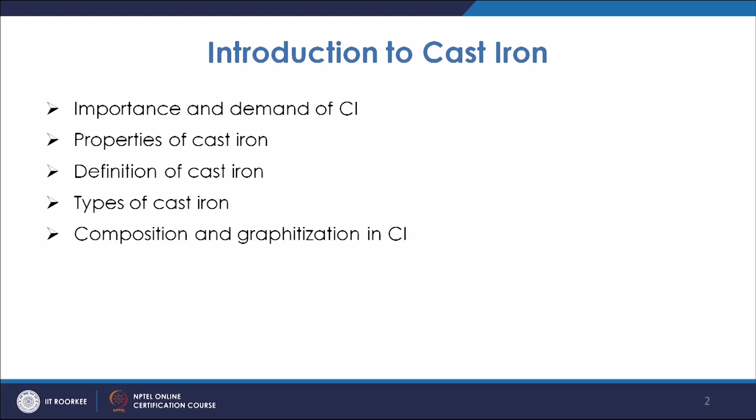Because of these properties and because of the ease with which it can be cast, this material is given so much importance. Most components, if you talk about the iron carbon system and alloys of iron carbon base, because of certain advantages in terms of casting, you always prefer to use cast iron.

So what is cast iron basically? Cast iron is the alloy of iron and carbon where carbon percentage is more than 2%, and apart from carbon you have other alloying elements like silicon, manganese, and small amounts of sulfur and phosphorus. So that is cast iron.

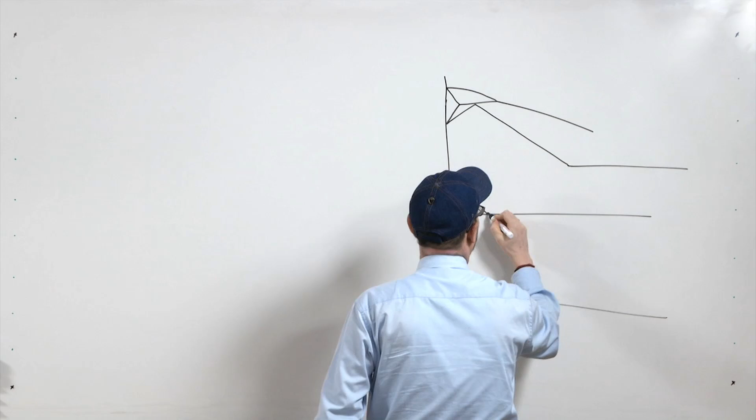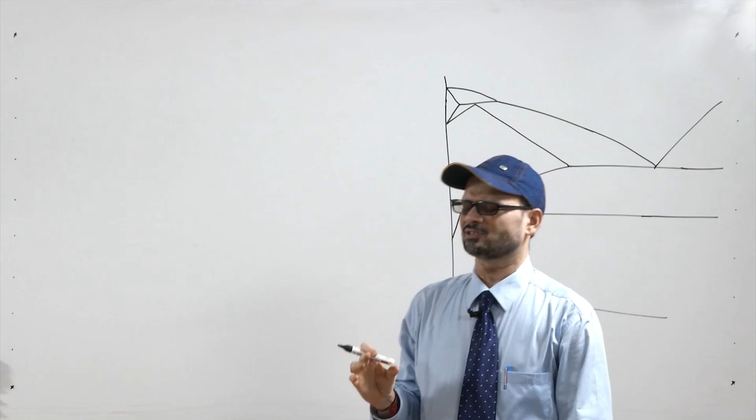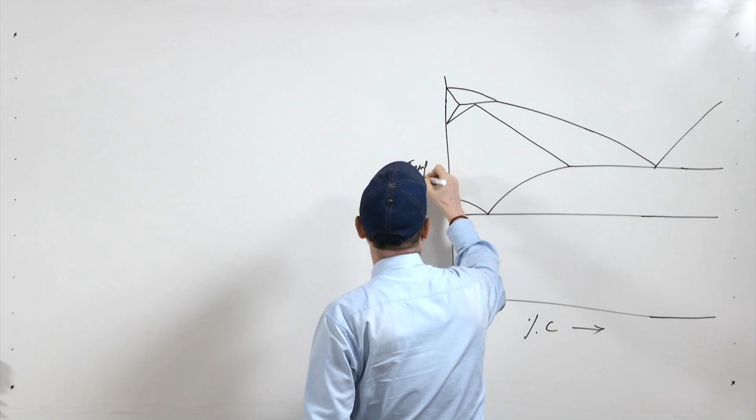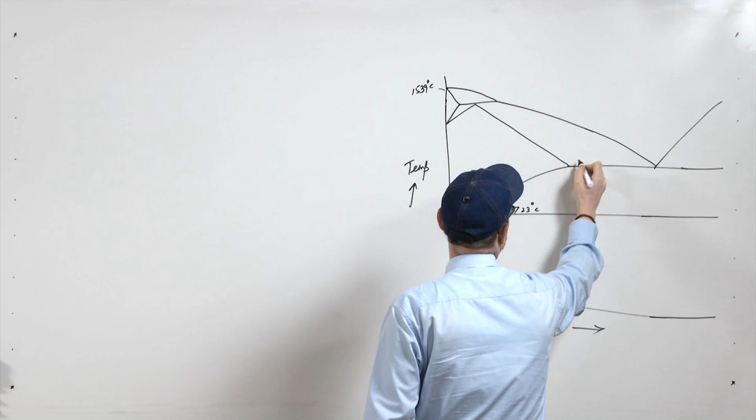Now let's see the difference between cast iron and steel. When we talk about steel, if we see the iron carbon diagram at this point, it goes like this. This is a normal iron carbon diagram - you have equilibrium as well as metastable equilibrium diagram. On this axis you have percentage carbon and this is the axis of temperature. We see this is close to 1535 or 1539 degrees C, and then this is the 723 degree centigrade line, this is the 1135 degree centigrade line.

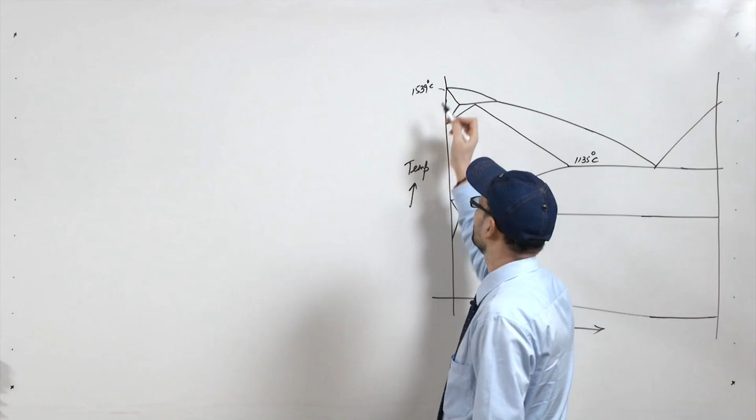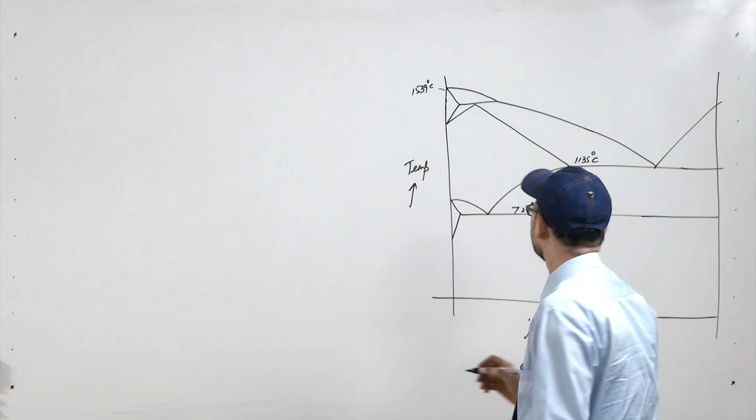As the carbon percentage is increased from pure iron - this is 100% iron, and in this direction the percentage of carbon increases - we see that pure iron melts at about 1539 degree centigrade, but as the carbon percentage increases, this liquidus line decreases. This point is known as the eutectic point, where the carbon percentage is 4.3%, this is 2%, and this is the eutectoid point, at 0.8%.

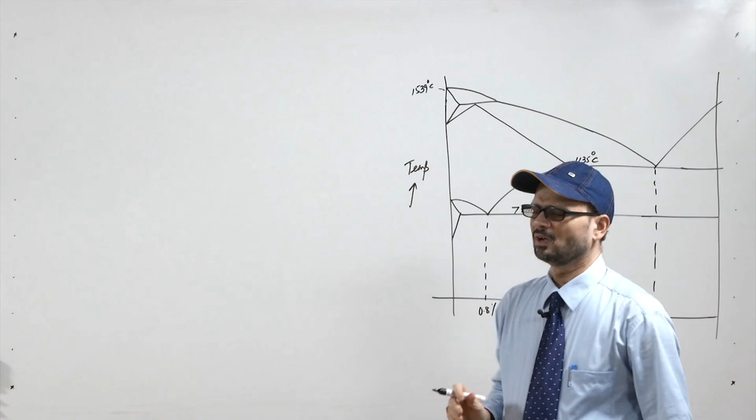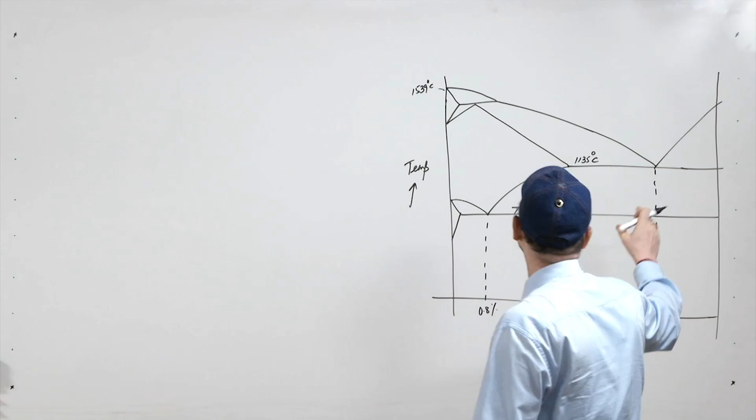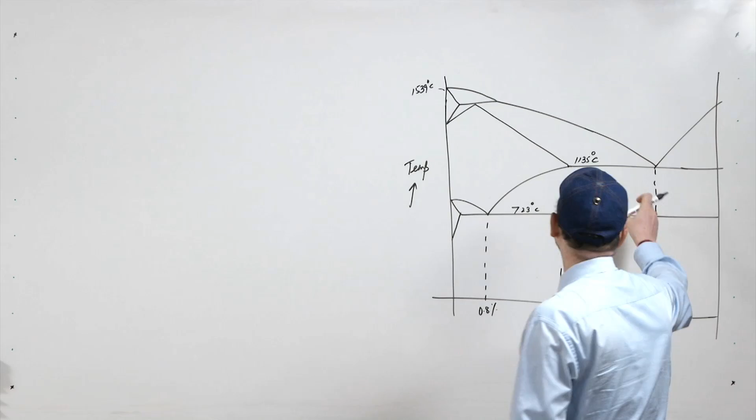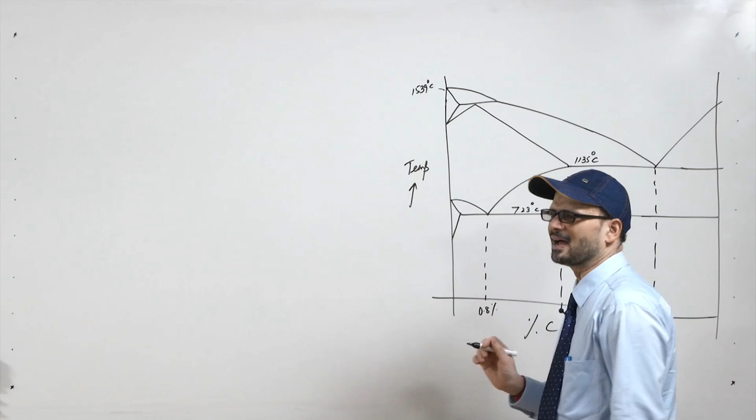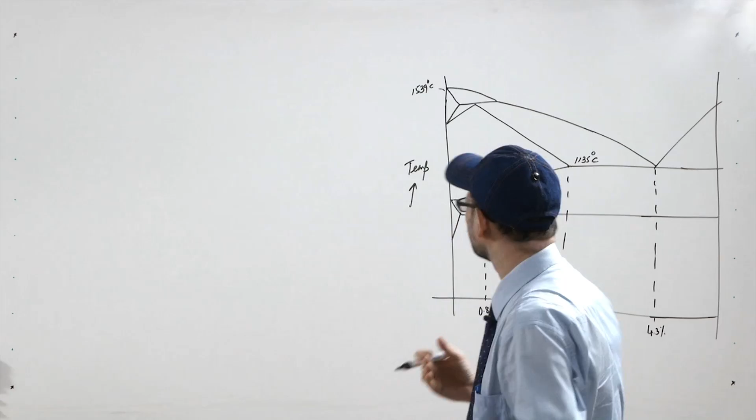Even a cupola is enough to produce grey cast iron or cast iron varieties of materials. However, if we talk about steel, steel is normally an iron carbon alloy with some alloying elements, but below 2% or 1.5% carbon - and that range requires quite high temperature. So you require a furnace that can generate high temperature, and in that case the furnace requirement and the lining requirement have to be different.

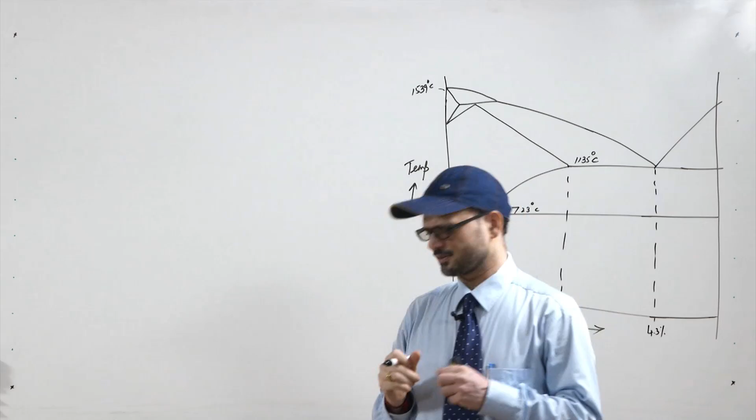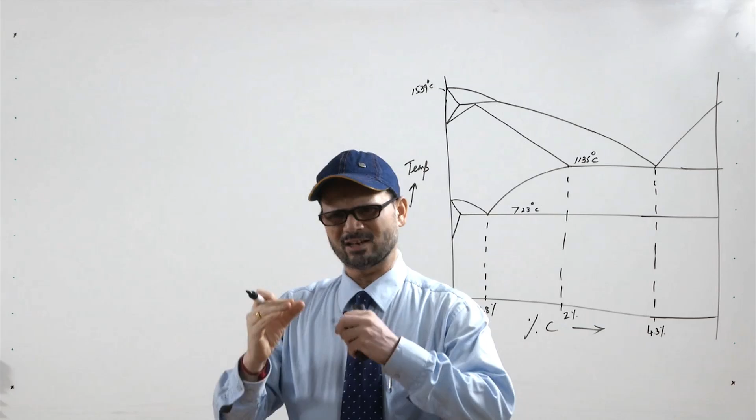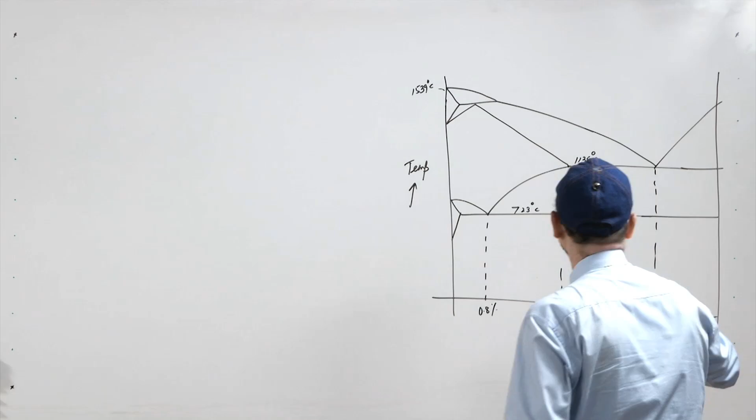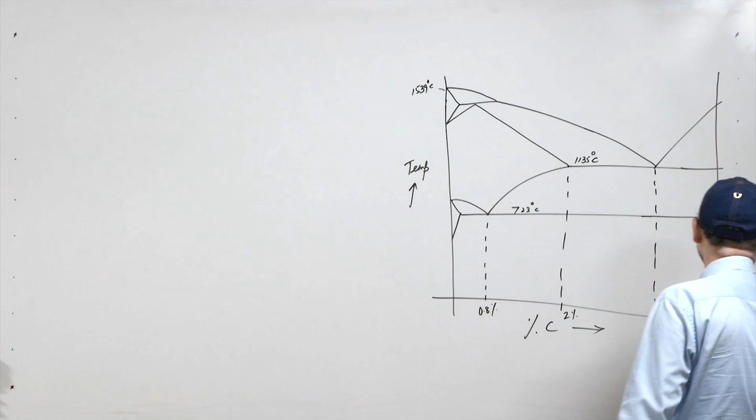Apart from that, in the case of cast iron, apart from iron and carbon, one of the chief alloying elements which plays an important role is silicon. Silicon is a graphitizer. The carbon that is in steel up to this point is normally present in combined form with iron as Fe3C - 6.67% is Fe3C, which is the intermetallic compound cementite.

Now in the case of cast iron, the composition as well as the cooling is adjusted in such a manner that when it cools, this excess carbon is basically changed to graphite - that is free carbon. So in that case this carbon is not in the form of Fe3C. It depends upon the cooling rate and composition.

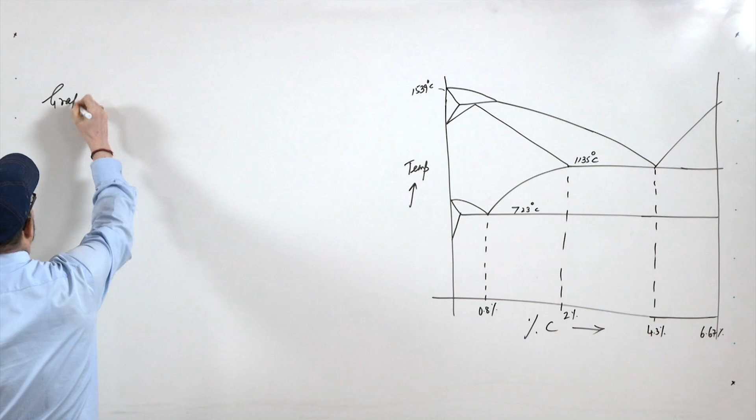The carbon may transform to the combined state, that is Fe3C form, or carbon may go as graphite. Now this process is known as graphitization, meaning the carbon which is there in excess has to change to the graphite form.

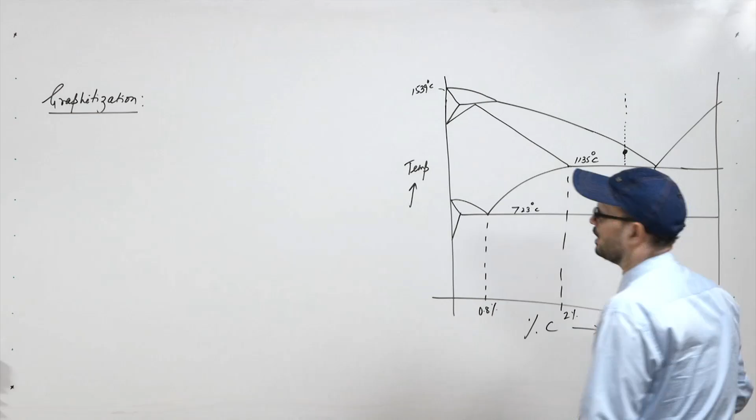Now let us see what happens if you have this point which is coming, we are melting at this point. When temperature has become less than this liquidus line, once you come below this liquidus line, you have liquid plus austenite. So this is your austenite, this is austenite plus liquid.

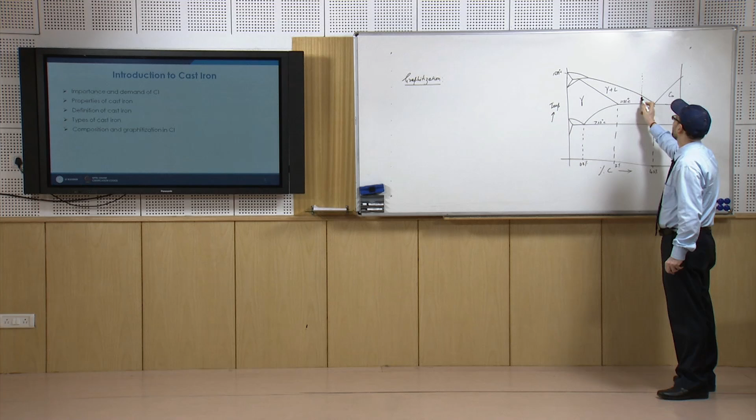So this is your cementite, and then this is basically the eutectic line, that is ledeburite. Now once you have come to a temperature below this, you have at this point austenite plus liquid. So you have solid crystals of austenite coming out, and this austenite has a composition corresponding to this point. So as the temperature comes down,

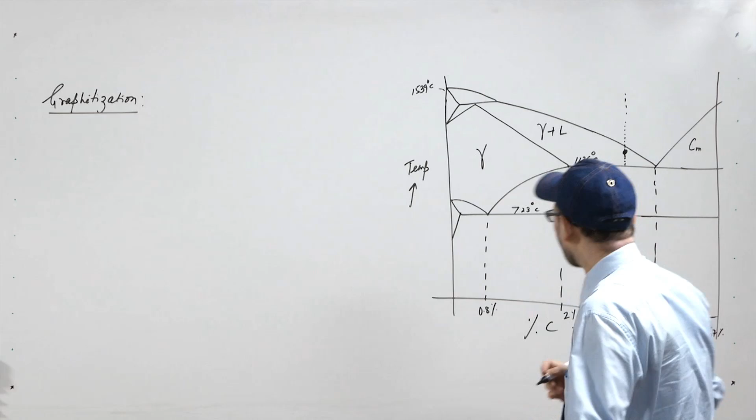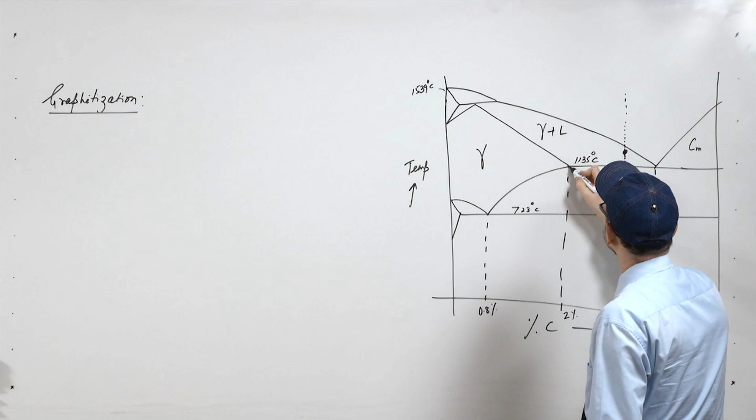this austenite will basically be losing the carbon. At this point, up to 2% of carbon, the austenite has a maximum of 2% carbon. After this, once it comes just below this line, the freezing is completely complete, and at this point you have austenite with maximum composition of 2%, but once it comes down, again the carbon solubility in austenite decreases as per this line.

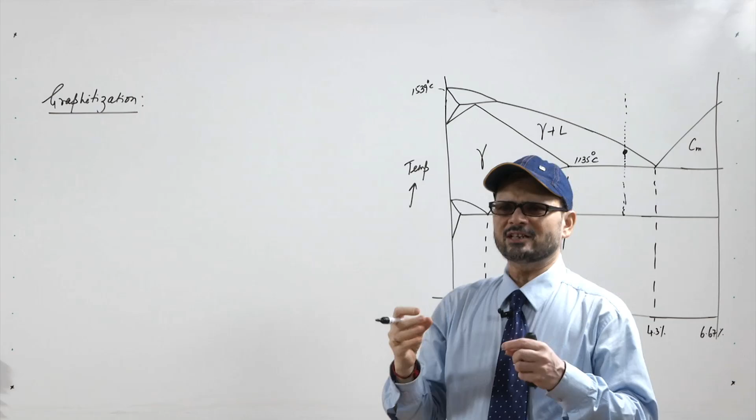So once it comes to this line and touches it, the austenite which was there will be losing carbon, and maximum it can have is 0.8% carbon. So it will be somewhere close to 0.6 to 0.8% carbon it can maximum dissolve. So all the extra carbon will be disposed of, it will be left by this austenite. Now this carbon, once it goes, may appear either as combined form or as graphite form.

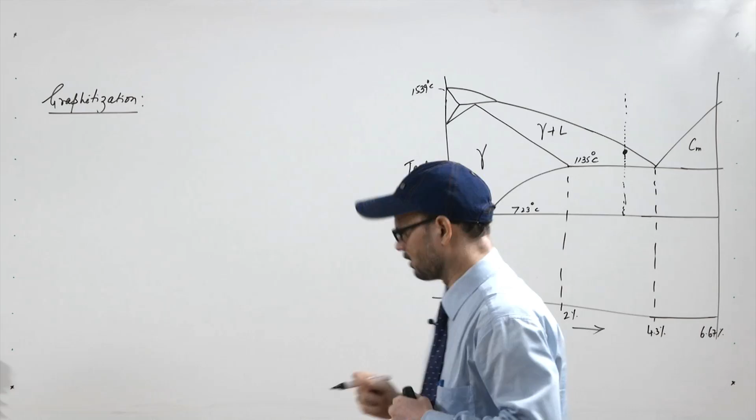Now the chief role of the alloying element silicon is that silicon is a graphitizer. So because of the presence of silicon and also because of the low cooling rate, this carbon is basically present as graphite. So graphite is soft, and that is why in cast iron, as you cast in normal circumstances, if you have enough silicon and the cooling rate is moderate, you get the carbon in graphite form.

So that is how this happens, and once it further comes down, then depending upon the extent of graphitization, once we come after this line, you have this composition, this is your eutectoid. So you have this pearlitic structure, you have ferrite plus pearlite. So the matrix may be ferrite or pearlite or a combination of ferrite and pearlite.

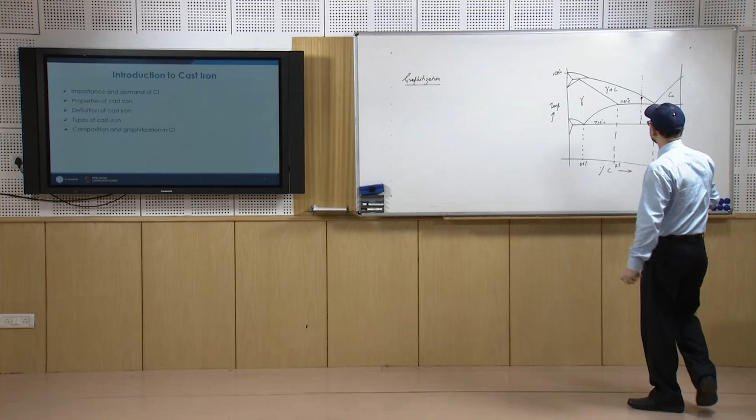Now again, what type of matrix you will get depends upon the extent of graphitization. So if the graphitization is maximum, then you are likely to get the ferritic type of matrix, because most of the carbon which is released is present in the form of graphite because of the graphitization process and because of the presence of alloying elements like silicon.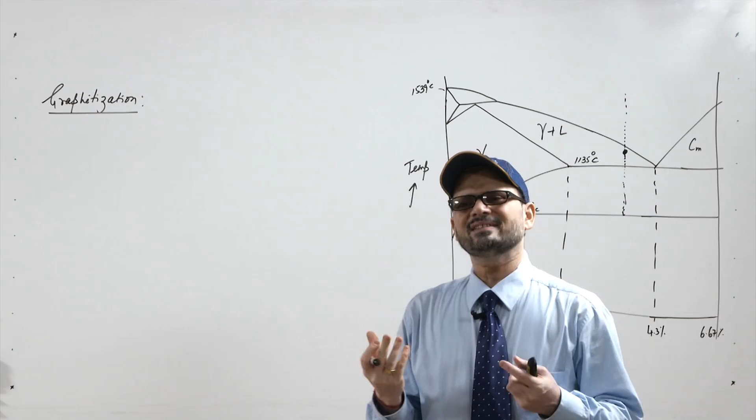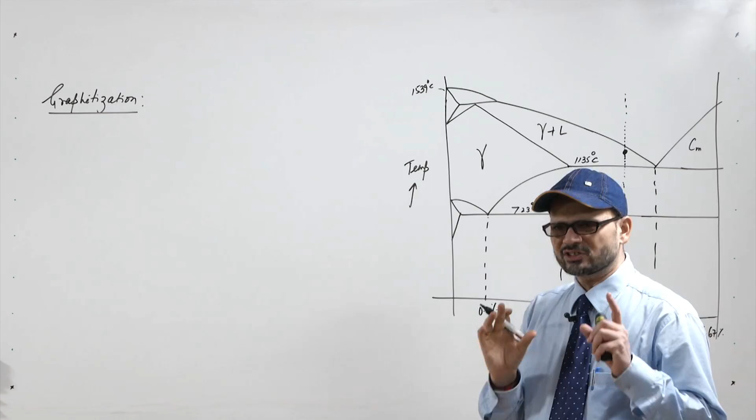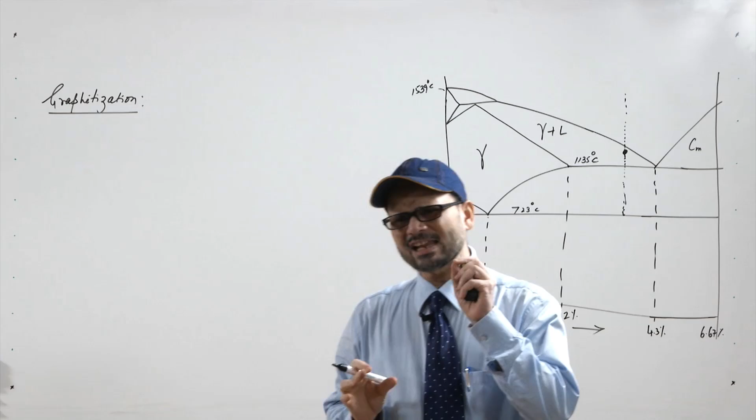So when the graphitization is maximum or high, the rate of graphitization is better, and in that case you get a ferritic matrix. If the graphitization is not so high, either because of not adequate amount of silicon present or because of a slightly larger cooling rate, in that case you may get a pearlitic type of matrix. So basically silicon is working as a principal alloying element which controls the microstructure of these cast iron components.

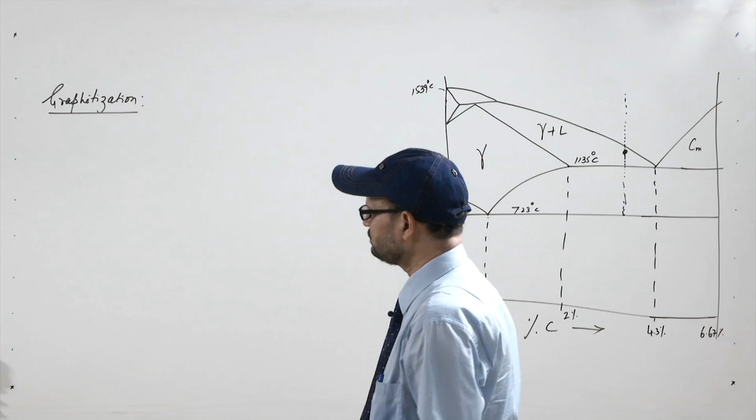So we can look at this figure which tells us that there are varieties of cast iron, as I told. As we see in the case of steels, the silicon percentage is maximum 2, but in cast iron it goes up to 3 or 4 even, and what we see is when the silicon percentage is more, this is grey cast iron.

So in grey cast iron, when silicon is more, there will be more graphitization and carbon will be separated as graphite structure. That is why you get grey cast iron, whereas when silicon is less, you get white cast iron. If the carbon percentage is up to 2%, you have the variety of steels. However, if the carbon percentage is more than 2 and silicon percentage is also less, you have the variety of cast iron known as white iron, and white iron, depending upon the heat treatment given to it, is converted to malleable iron, which we will discuss later.

What we see is when the cast iron has a larger percentage of carbon as well as silicon, more graphitization takes place, and because of that grey cast iron is formed, where this cast iron is defined as such because the fractured surface appears grey.

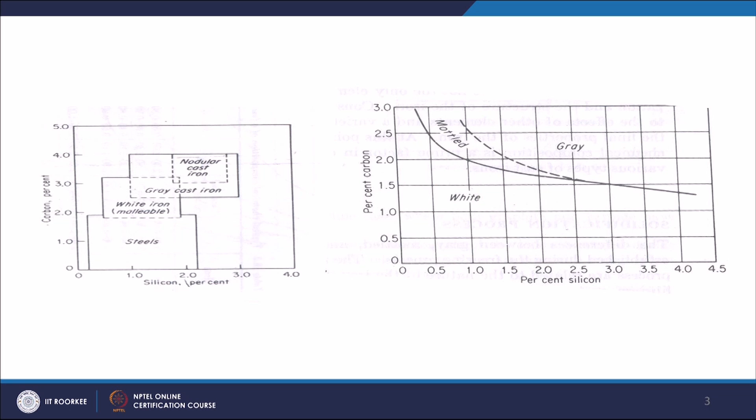This diagram further tells how you get the different varieties of cast iron. What we see is when the silicon is higher and carbon is higher, you get the gray iron, and when you have these smaller quantities you get the white iron, and in between you get the mottled iron. And if the cooling rate is maintained as a low value, this curve will shift towards the left, so even at smaller values of silicon and carbon, you may get the gray iron structure.

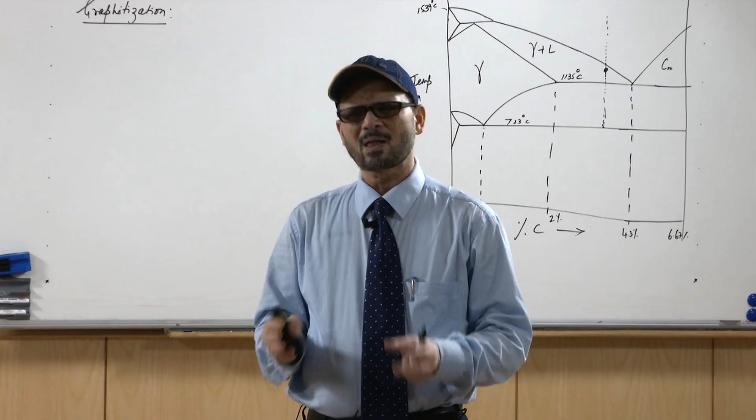And if the cooling rate is fast, then this curve will move towards the right, meaning for the same composition you are likely to get either the gray iron structure or white iron structure depending upon the cooling rate. If the cooling rate is less, it is likely that you will get gray iron structure, or if not, you may get the white iron structure for that particular composition.

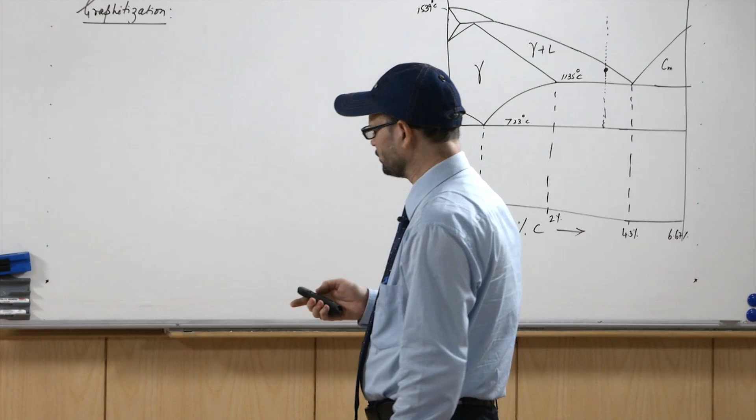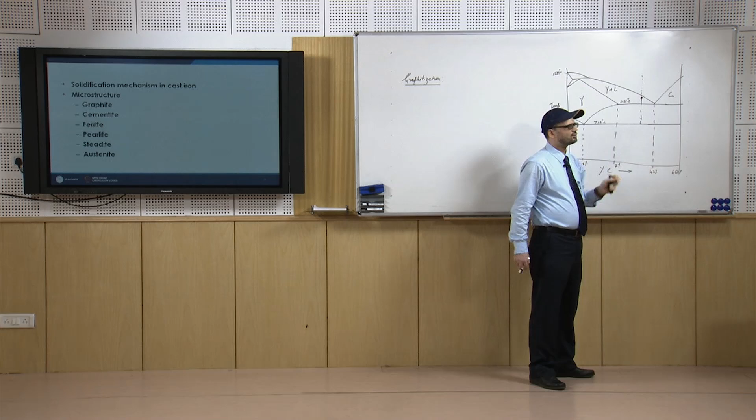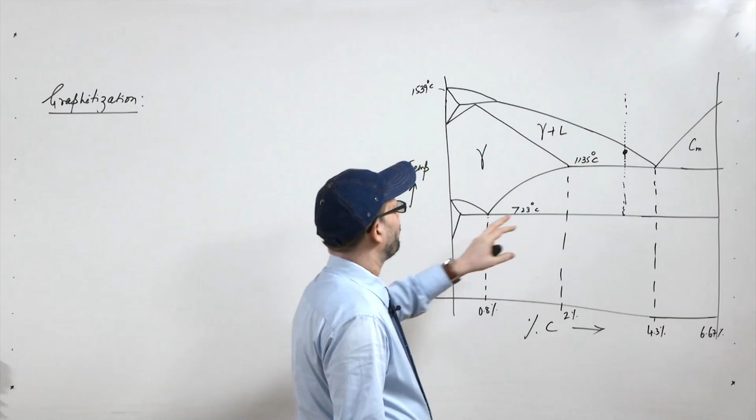Now, you have to understand the mechanism of solidification that we have discussed, how this solidification takes place as we go below this temperature, how this carbon, the excess carbon, comes out of solution, and then the austenite also loses carbon. Finally, depending upon the cooling conditions and the presence of alloying elements, this carbon will either be in the form of graphite or in the form of Fe3C. So at room temperature you may have different matrices, maybe pearlitic or ferritic, and the carbon in different forms.

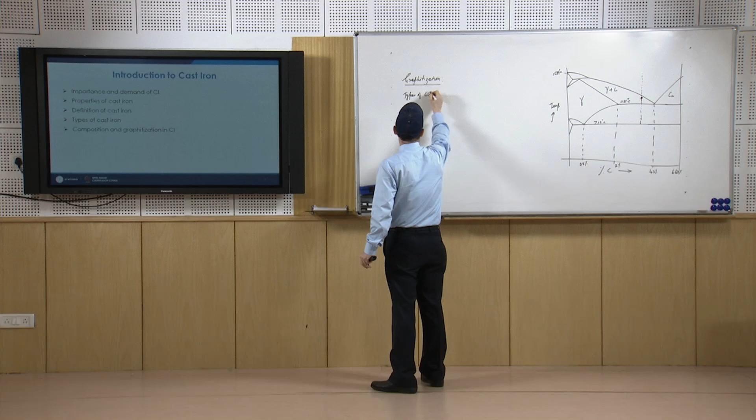So what we see is we have to discuss the types of cast iron. The first variety is grey cast iron.

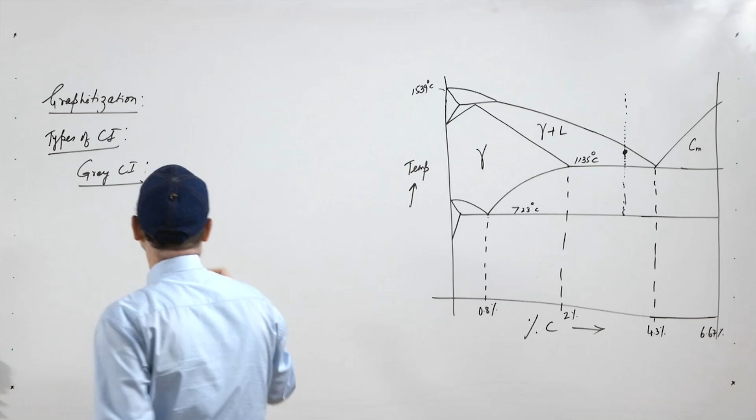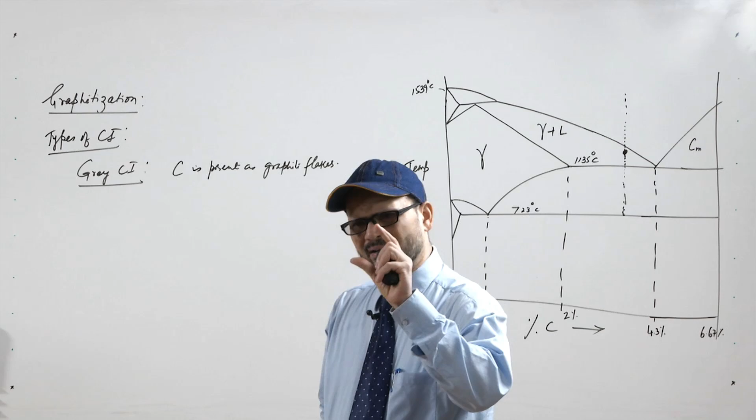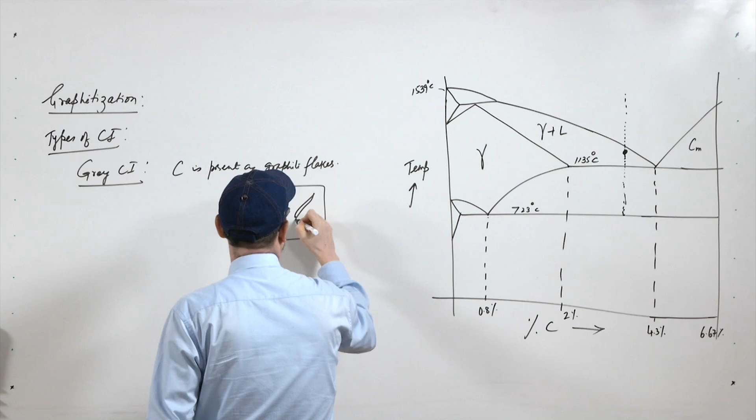Grey cast iron is defined as that variety of cast iron where the carbon is present in the form of graphite flakes. The fractured surface appears grey, that is why it is known as grey cast iron. Now in the grey cast iron, the value of carbon as well as silicon has to be on the higher side, and the cooling rate has to be moderate. So in that case the grey cast iron is formed, and the flakes are like this - these are the graphite flakes which have pointed ends, and this basically gives the material some inferior properties when subjected to tension.

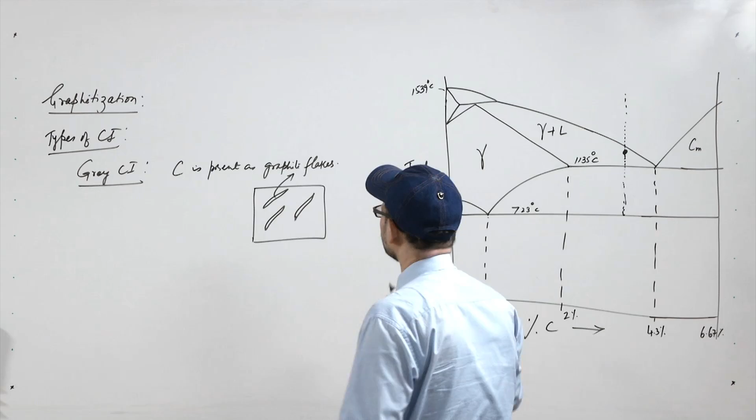But this grey cast iron has other very good properties, like good machinability and good damping capacity. That is why grey cast iron is very much favored for typical applications like machine beds, and many components are made by grey cast iron.

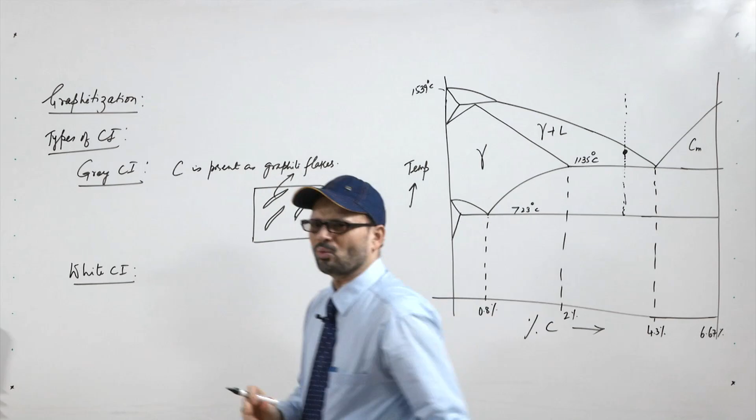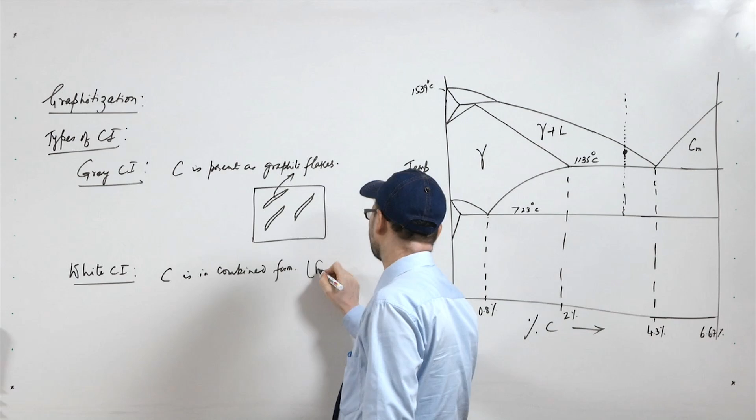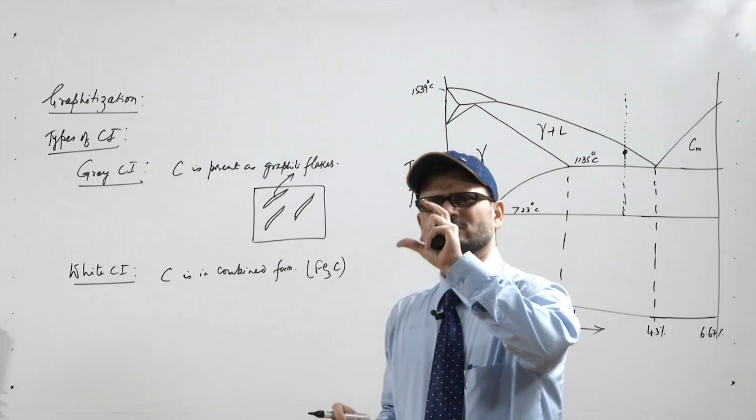Next variety is white cast iron. In the white cast iron the carbon is in combined form, that is Fe3C. Now this white cast iron is formed when the amount of carbon and silicon are both on the lesser side. Basically carbon as well as silicon are both graphitizers.

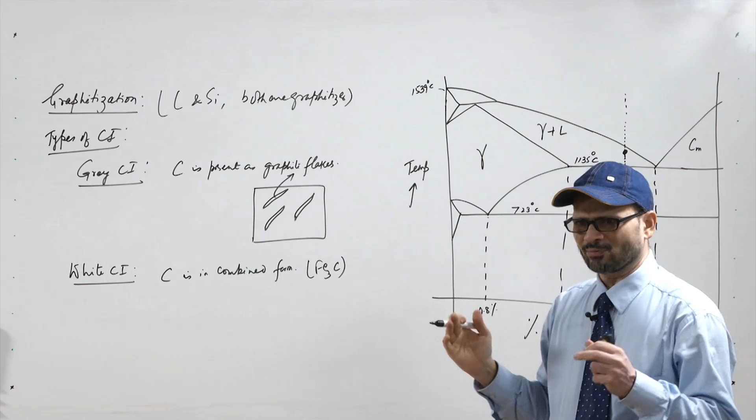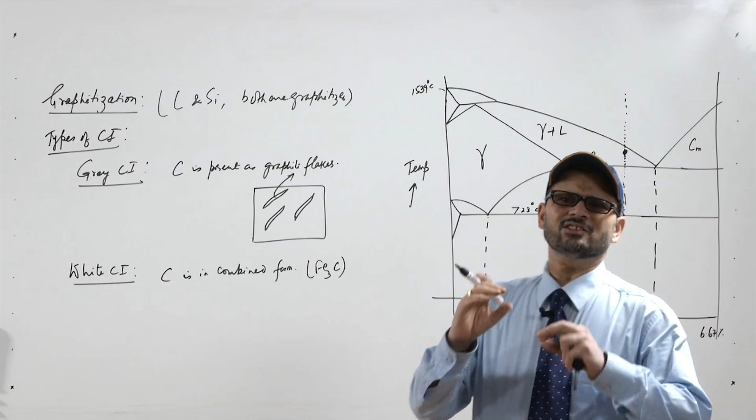So when the carbon and silicon are both on the higher side, when the carbon separates out, since it has a graphitizing tendency, the carbon goes in as graphite flakes. But when the carbon is less and silicon is also less, and if the cooling rate is a little fast, the carbon is in the form of Fe3C, that is carbide, and that is why this is known as white cast iron - the name white appears because the fractured surface appears white. It has very high hardness, ductility is less, and it is mostly not used for any engineering purposes, except where very high compressive strength is desired, like for rollers in steel plants.

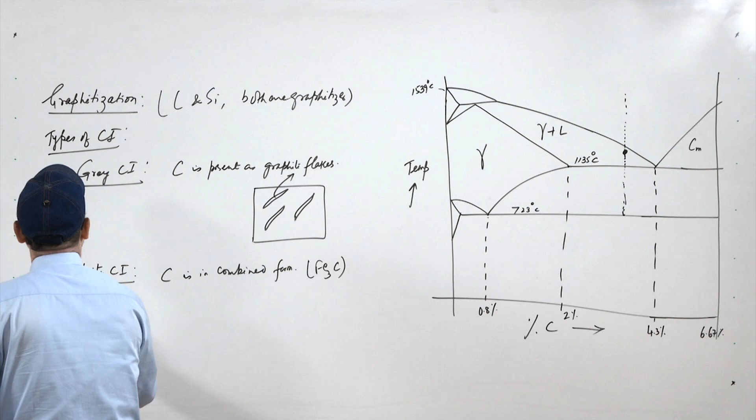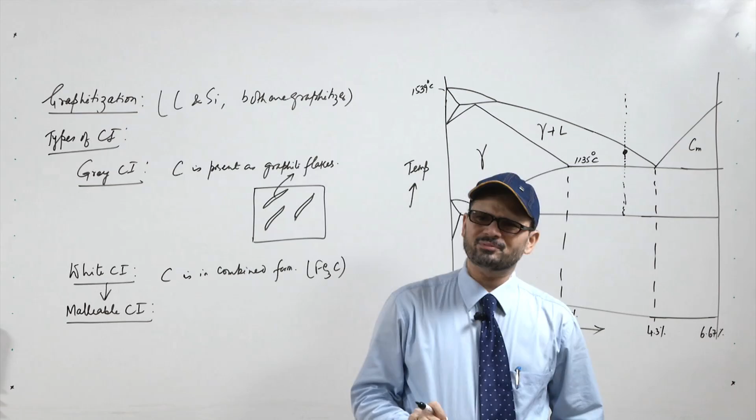So there is a variety of cast iron called malleable cast iron, which is basically obtained from white cast iron. Since white cast iron is of no use, we do heat treatment - heating and holding this white cast iron at a temperature more than the transformation temperature, and holding it there for a very large time.

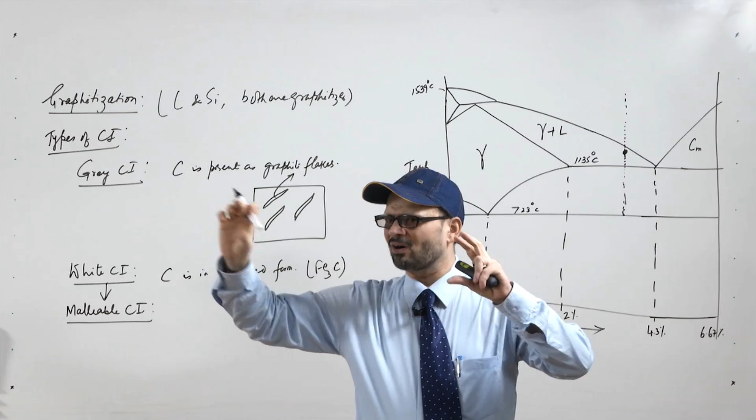So due to holding for a large amount of time, this basically decomposes into iron plus carbon. This carbon is released as free carbon or temper carbon, so the carbon is in temper form.

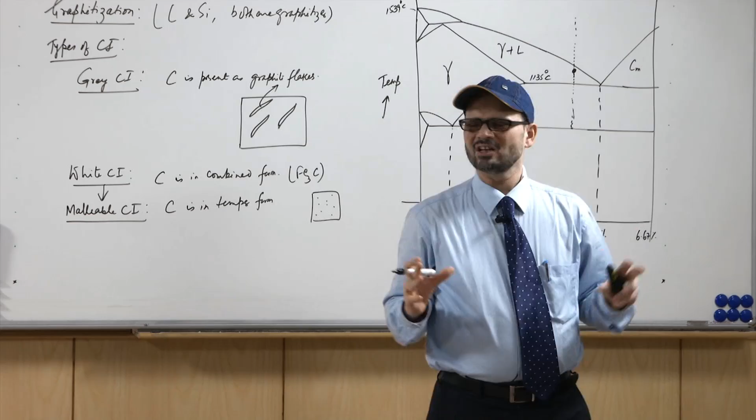So, in temper or free form carbon, there are small nodules - smaller nodule type structures of free carbon are present, and this basically gives a large amount of ductility and malleability to the component. This malleable cast iron, although its heat treatment cycle is quite large, is used for many automobile components where you need the malleability or ductility property.

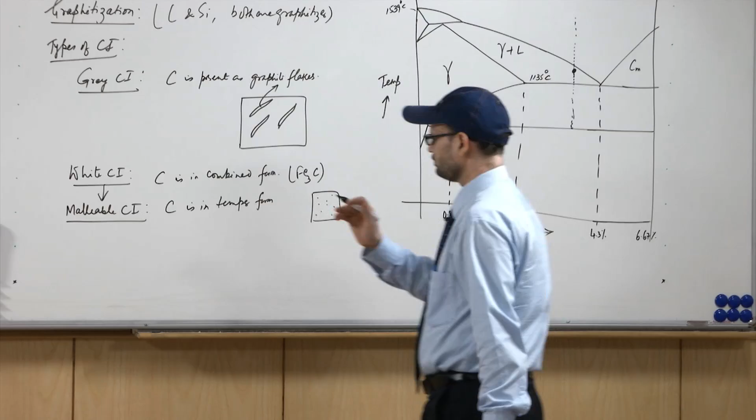The next variety is ductile iron. So, ductile iron is that variety of cast iron where carbon is in nodular form.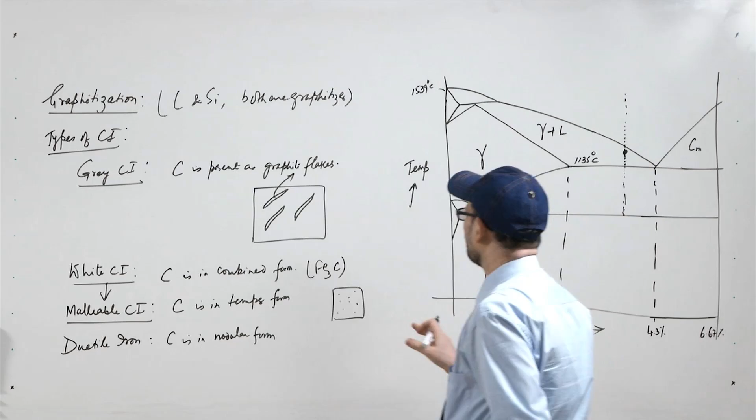In malleable iron you get small nodules or small free carbon, small sizes of nodules, but in the as-cast form we can get the nodules of graphite by treating this cast iron. So, for the same composition of cast iron towards the higher side of carbon and silicon, if we treat the melt with magnesium, cerium or yttrium, we get a cast iron which has larger shaped nodules.

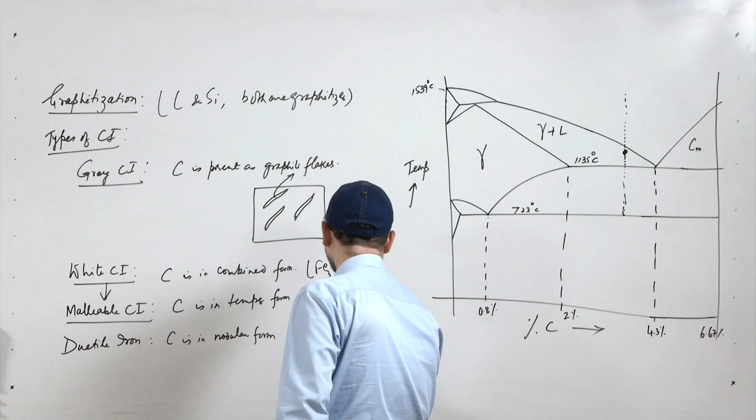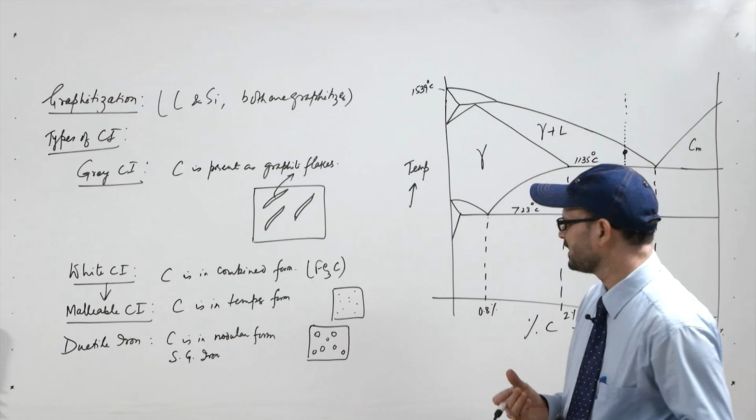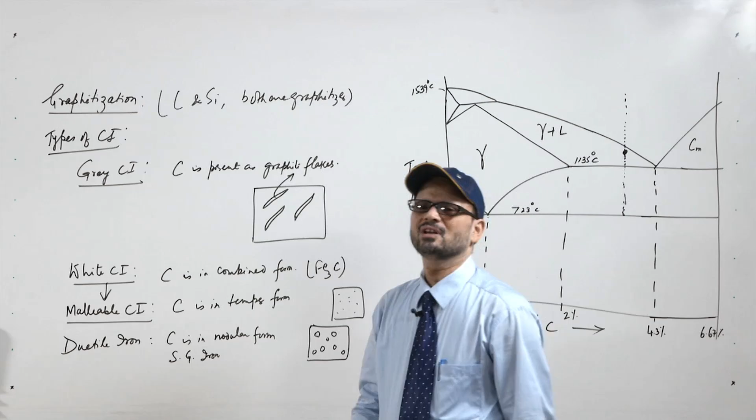Because of the presence of these graphite nodules, it is known as nodular iron, or also SG iron - spheroidal graphite iron. It has a very good combination of properties. Because of these nodular shapes of graphite, the adverse effect we get in grey cast iron because of the pointed ends is gone, so its properties are quite better. We can get it by magnesium treatment. There are many ways of doing this magnesium treatment in the case of ductile iron, and we get good properties of ductile iron.

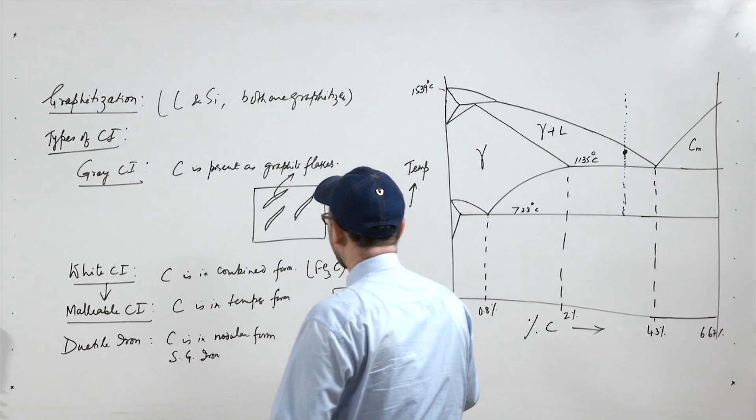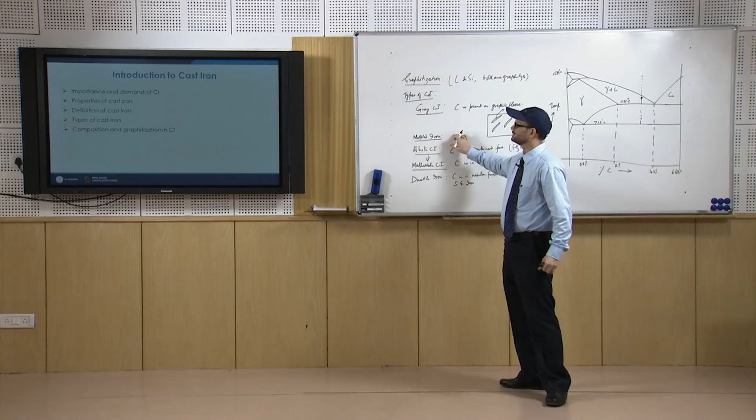Then there are other varieties also, like mottled iron. For a particular composition, depending upon the prevailing cooling condition, some part appears as white and some part as grey cast iron. In that case they are known as mottled iron - you have different sections, some part white and some part grey. That is known as mottled iron.

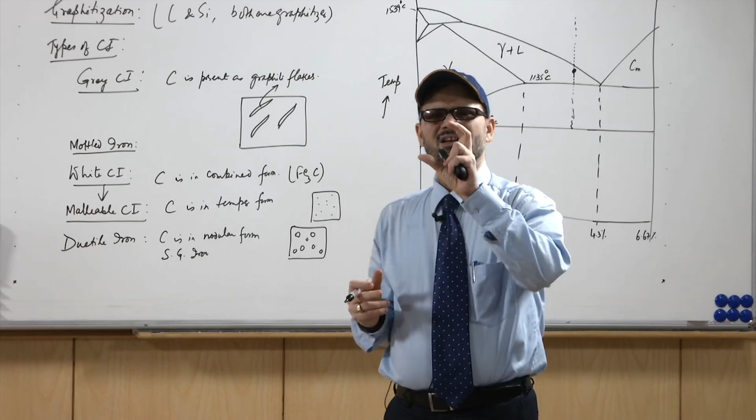You also have chilled cast iron. Because of the chilling effect, some part is white cast iron and some part is grey cast iron, where the chilling is not there. So mainly you have these four varieties of cast iron.

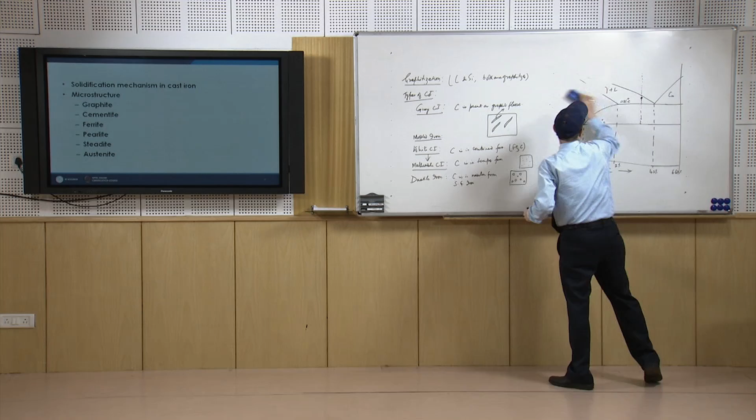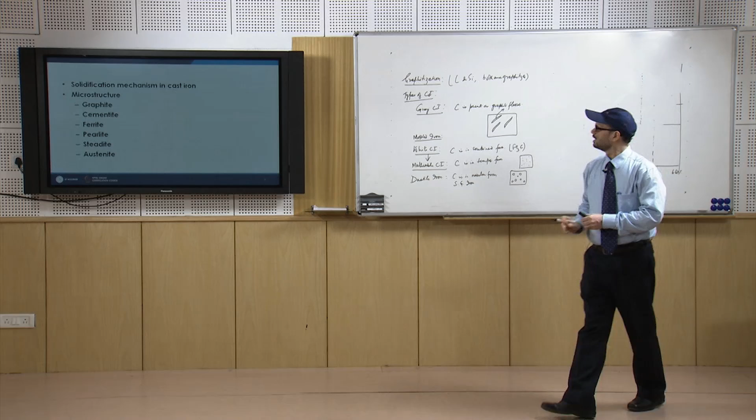Now, microstructure. If we talk about the microstructure in case of cast iron, it mainly consists of a few phases, and these phases are outlined there. So what we see is phases like graphite - carbon is in the form of graphite. Carbon may also appear as cementite.

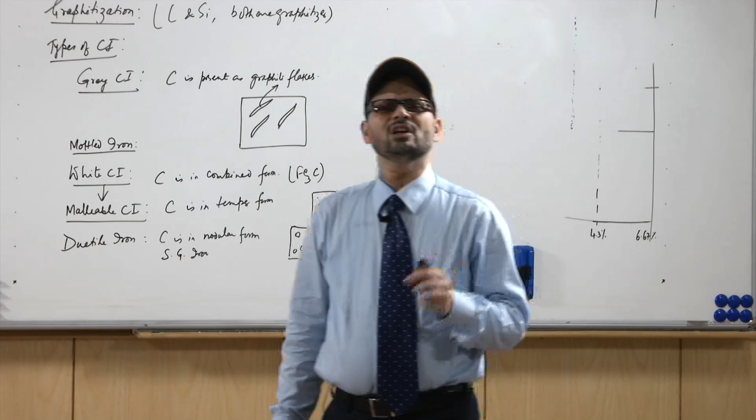So basically, when carbon is in the form of graphite, it induces ductility or malleability to that variety of cast iron, whereas if carbon is in the form of cementite, it induces hardness or brittleness to that particular variety of cast iron.

Ferrite is a phase - as we have understood so far, depending upon the extent of graphitization, you may have a ferritic matrix or a pearlitic matrix, or a combination of these two. Steadite is a phase which is nothing but a eutectic of iron and phosphorus, somewhere close to 1000 degrees or so. It has a very low melting point, forming a eutectic, and it is used beneficially - it imparts better fluidity to the cast iron.

That is why when casting a component in shallow or thin sections, some amount of phosphorus, if present, because of this low melting point eutectic formation, may help give us a large amount of fluidity.

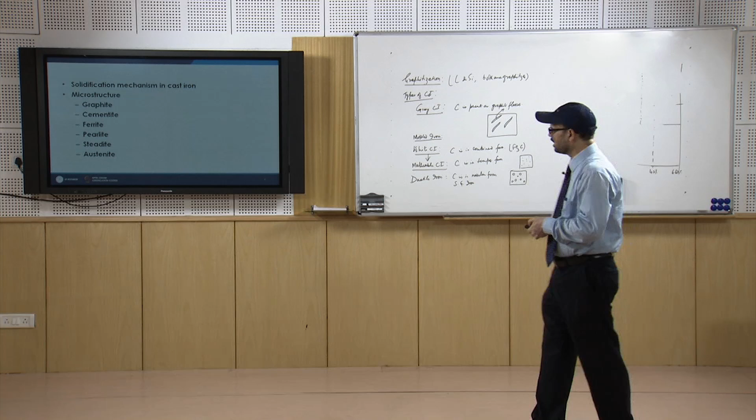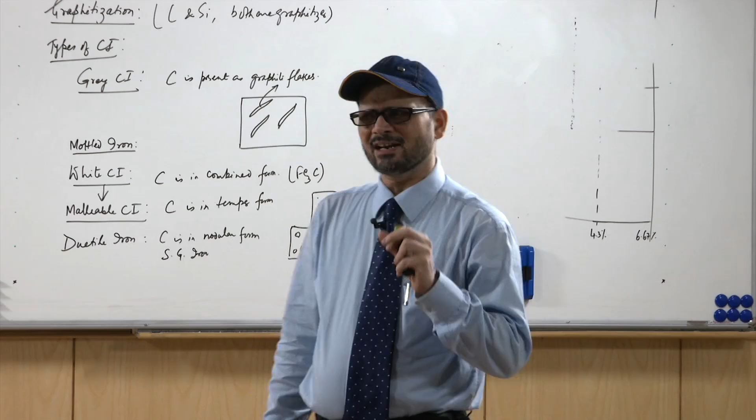Austenite, as we know, is otherwise not a stable phase at room temperature, but if we add nickel as the chief alloying element to a larger extent, nickel being an austenite stabilizer, you also get the austenitic phase in that cast iron. So, depending upon the conditions, you may have the formation of these different phases, different kinds of matrices, and different varieties of cast iron.

They are grey, mottled, white, malleable or ductile iron. In the coming lectures we will discuss the melting practices for these different varieties of cast iron, their characteristics, their uses, and how to identify them. There is also one more terminology, carbon equivalent, which we will discuss in our coming lectures. Thank you.